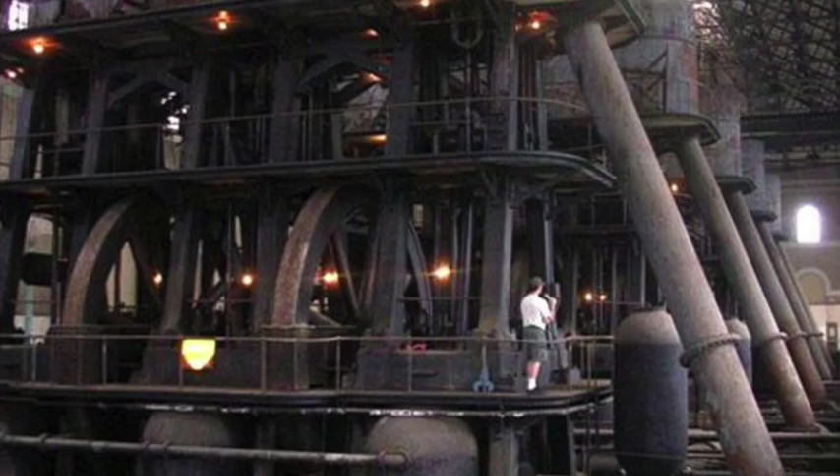In this video, we'll be discussing the methods of wastewater management and its specification to our city. Due to the density of an urban environment, there is not always room to construct wastewater treatment plants in the heart of a coastal city. To combat this, cities will often establish pumping stations.

These structures handle raw sewage carried by downward-sloping pipes located throughout the city. The sewage is stored in pits called wet wells that are found within the pumping stations. When the sewage-filled water reaches the predetermined level, the pumping process begins.

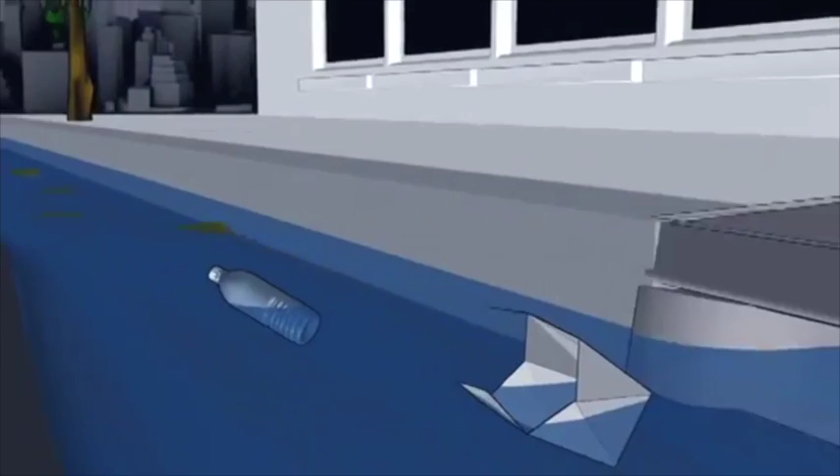The wastewater is pushed upward through pressurized pipes into a series of additional wet wells and pipes until the wastewater reaches its destination, which is most likely a wastewater treatment plant in the outskirts of a city.

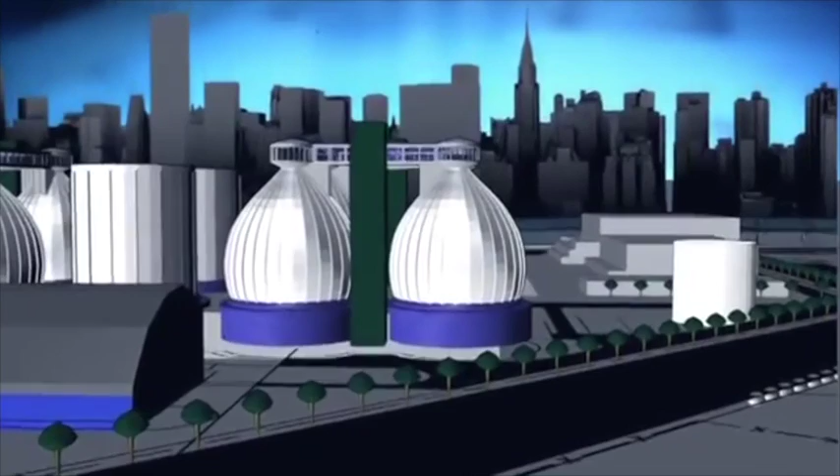Oftentimes, blockages occur in these pipes caused by sediment and fat buildup. This is problematic because the cleanup process is very costly. In addition, wastewater that is released into streams upon the flooding of sewers is contaminated with fat, oil, and grease products.

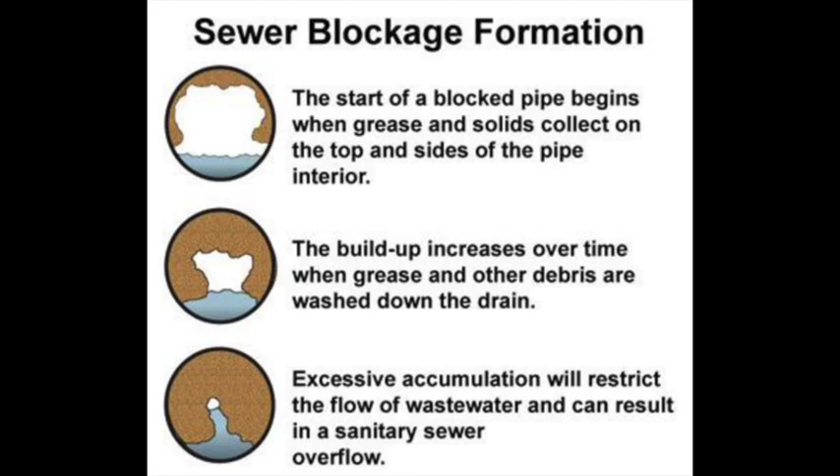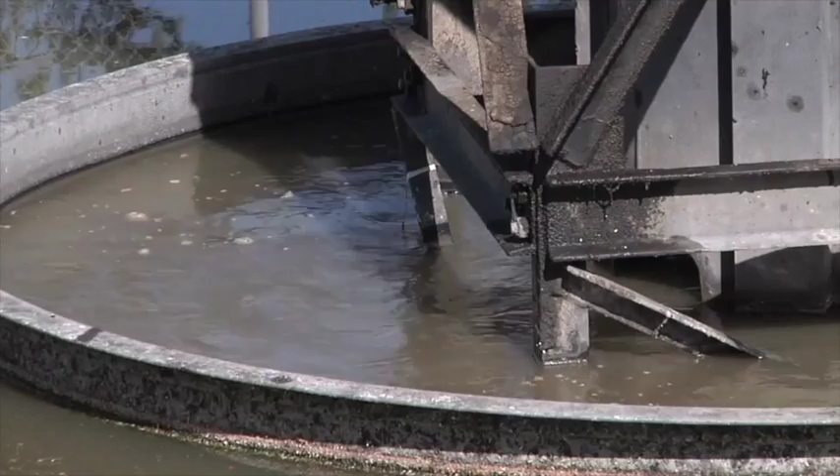Once the water reaches the wastewater treatment plant, it goes through a preliminary treatment to remove large objects from the water. The wastewater is passed through a bar screen to capture items that often include branches, leaves, and plastic wrappers. This solid waste is then removed and disposed of in landfills or incinerated.

After big solids are removed from the bar screen, the wastewater is passed on to the grit chamber. The wastewater is slowed down so that smaller solid particles like sand, grit, or stones can settle to the bottom. In the settling tank, sludge is left to sink to the bottom, while oil and grease are left to float.

Oil and grease can be removed and treated separately, and they are sometimes recycled for soap making, while sludge can be disposed in landfills, incinerated, or used as agricultural soil amendment. Now, the wastewater is ready for the secondary treatment.

The secondary treatment stage exists to degrade the biological content derived from human waste, food, and soap. Conventionally, treatment plants would dissolve oxygen into the water in the aeration tank. This helps bacteria and protozoa to grow and feed on the biological content. These bacteria are removed later on too.

Now, the water doesn't smell that much, but to further improve the water quality before discharging it into sensitive ecosystems like coral reefs or estuaries, the water can undergo nitrogen and phosphorus removal or disinfection. After all this, the water can be finally discharged into nature or reused in agricultural or urban settings.

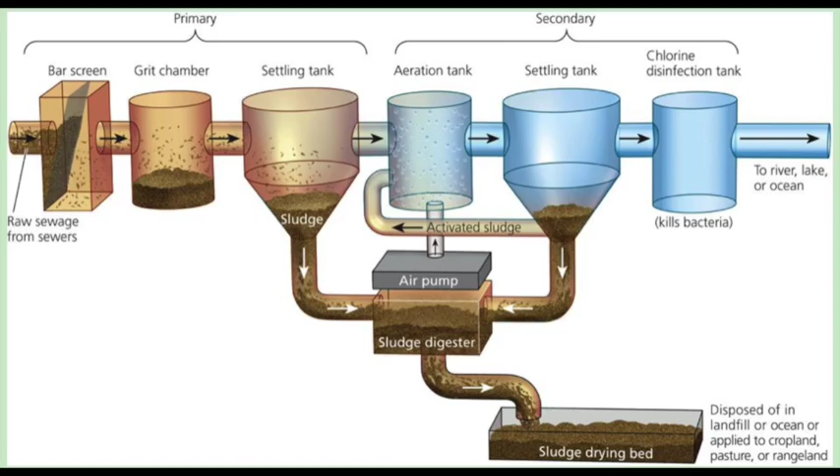The sludge treatment process is part of the secondary treatment process, and its primary focus is on the reduction of sludge weight or volume in order to decrease disposal cost. By decreasing the volume of sludge, cities also reduce potential health risks and odors.

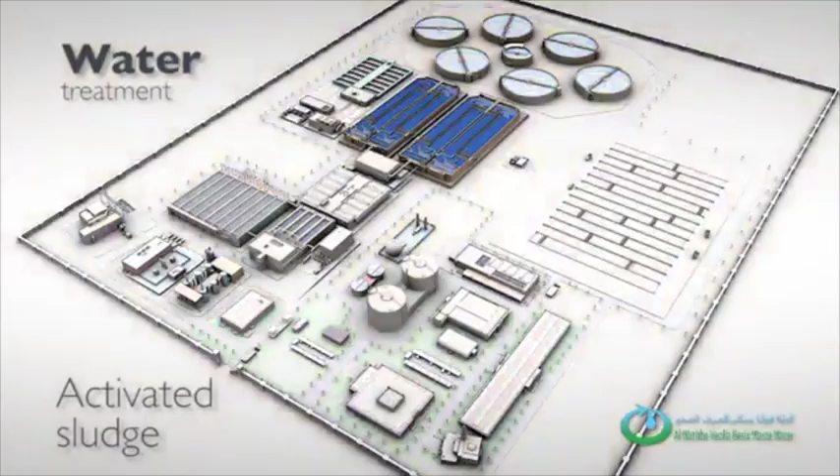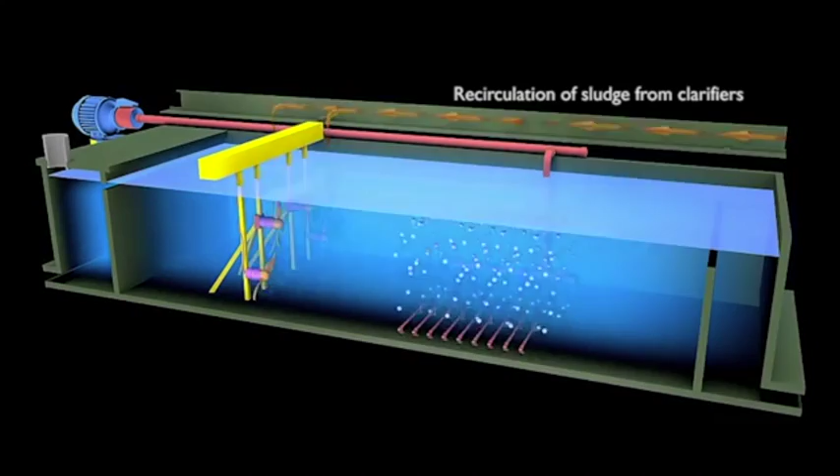There are various methods of sludge treatment, and the choice of the sludge treatment depends on the volume and financial cost. Therefore, in cities like New York, Abu Dhabi, and London that have a limited amount of land available, anaerobic digestion and mechanical dewatering are preferred.

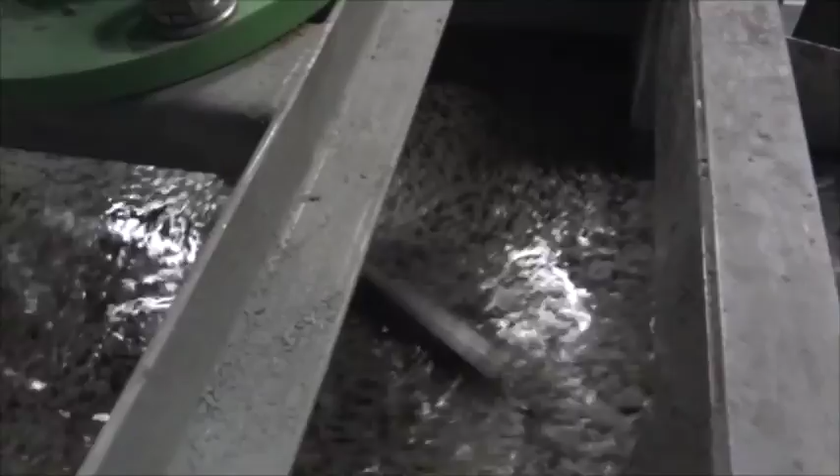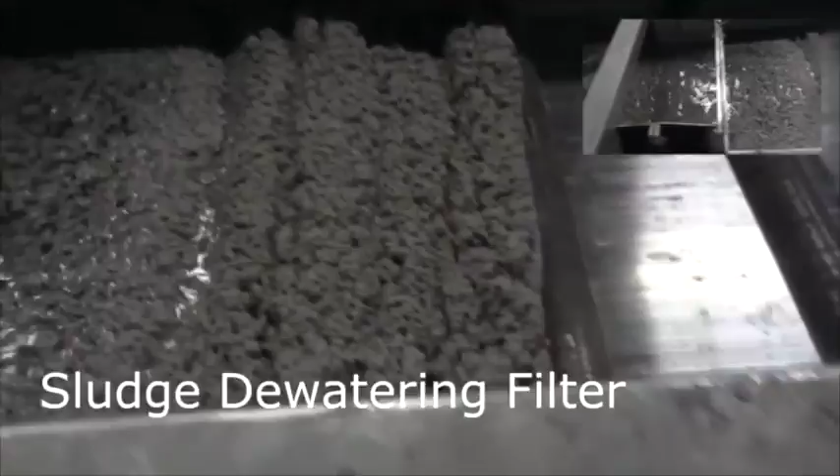The steps of the sludge treatment process begin with the thickening of the sludge by stirring the sludge with the addition of a clarifying agent. After, water is extracted from sludge by filtration or evaporation. The sludge is treated through a variety of digestion techniques.

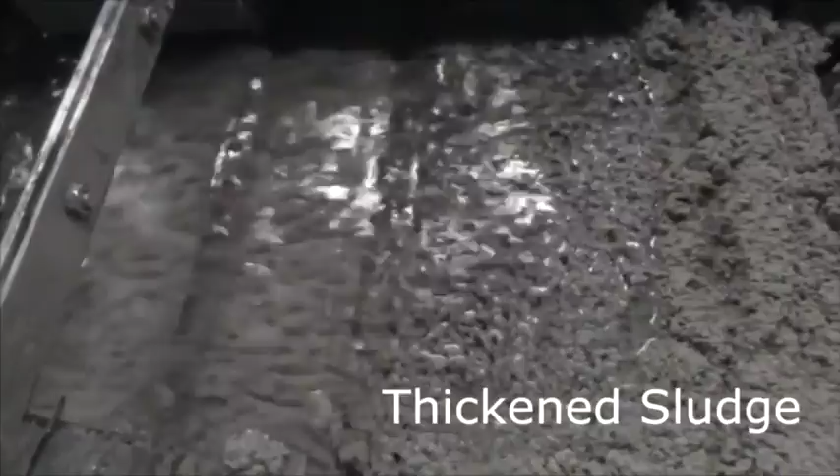For example, anaerobic digestion uses bacteria in a fermentation tank to break down proteins and sugar into simpler compounds such as water, carbon dioxide, and methane. Another method is aerobic digestion, which allows bacteria to rapidly consume organic matter and convert it into carbon dioxide. Products of sludge treatment could be used as fertilizers at the end or dumped into a drying bed.

New York City's wastewater management system consists of 93 pumping stations, 14 treatment plants, and thousands of miles of sewer pipes.

The treatment plants are located throughout the 5 boroughs, and many have unique qualities. The North River Wastewater Treatment Plant, for example, is the first and only wastewater treatment plant in New York to have a state park built on top of it. The plant itself extends several stories underground, while the roof boasts a popular recreational facility. It received the Water Environment Federation's Award for Outstanding Achievement in Water Pollution Control in 1994.

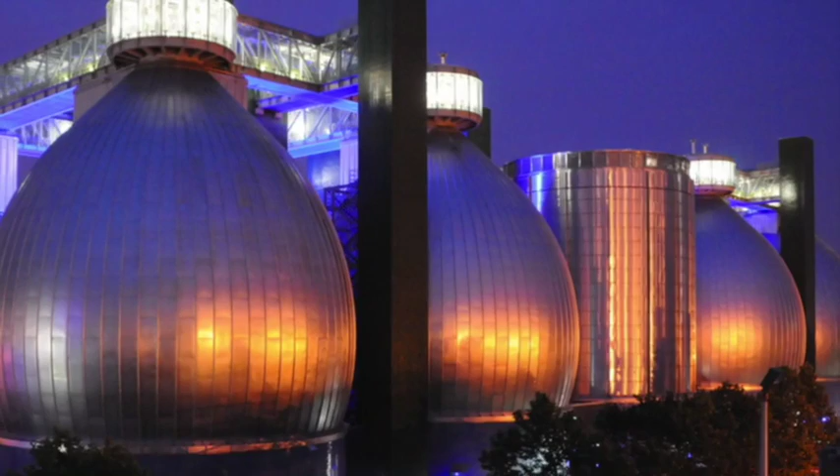In 2012, when Hurricane Sandy struck the eastern coast of the United States, New York City's wastewater treatment suffered $100 million worth of damage from seawater inundation in the facilities. The Department of Environmental Protection worked around the clock to repair damaged pumping stations and pipes, and just 4 days after the storm, 99% of New York's wastewater was being treated. In response to the storm, the DEP established the Wastewater Resiliency Plan, which calculated possible future costs and created new preventative measures to better the resiliency of the wastewater treatment system.

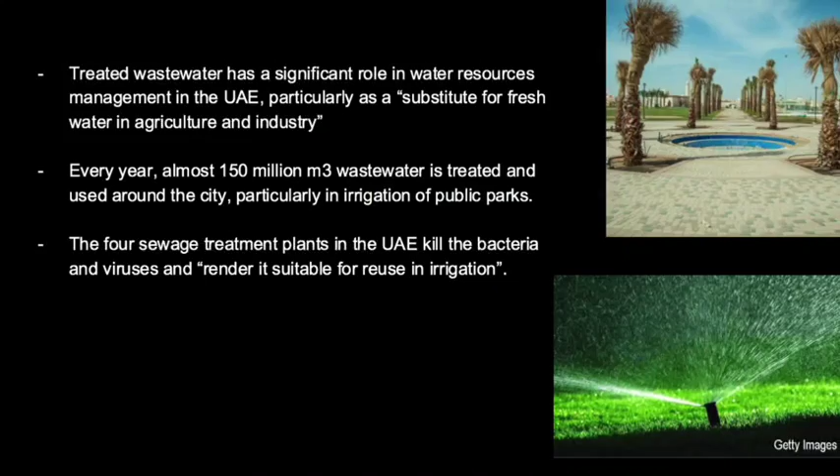Alright, now we will discuss the wastewater management in the case of UAE, particularly Abu Dhabi. The reclaimed water is used for irrigation purposes in the parks. Due to the arid climatic conditions in Abu Dhabi, there are no reservoirs, and hence treated water goes back to the sea, ocean, or the rivers. Some of the treated wastewater, almost 6%, is used for forestation in the desert areas of Abu Dhabi.

The Al Watba Wetland Reserve in Abu Dhabi was formerly in an area of a salt flat. The salt flat became waterlogged during winter rainfalls, and that presumably resulted in subsurface flow and hydrostatic backup during spring high tides. There was an accidental discharge of overcapacity treated sewage water from Al Mafraq wastewater treatment plant. The discharge had an unintended but positive impact on the biodiversity of the region and is now maintained by a regular supply of tertiary treated fresh water from a nearby sewage treatment plant.

After a successful breeding of the greater flamingo in 1993, Al-Watba was declared a natural reserve by the late President His Highness Sheikh Zayed bin Sultan Al Nahyan in 1998. It is currently home to a wide variety of fauna and flora due to a range of habitats including freshwater lake, saline lakes, tall reed marshes, sand dunes, and sabkha.